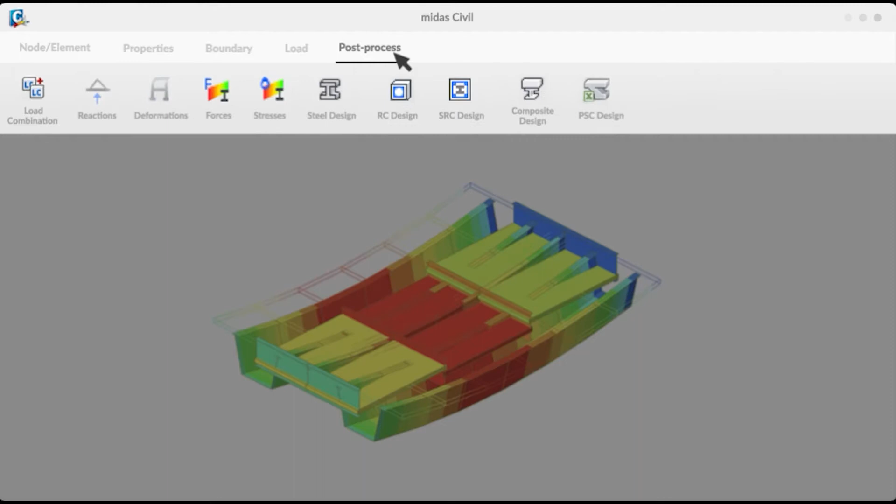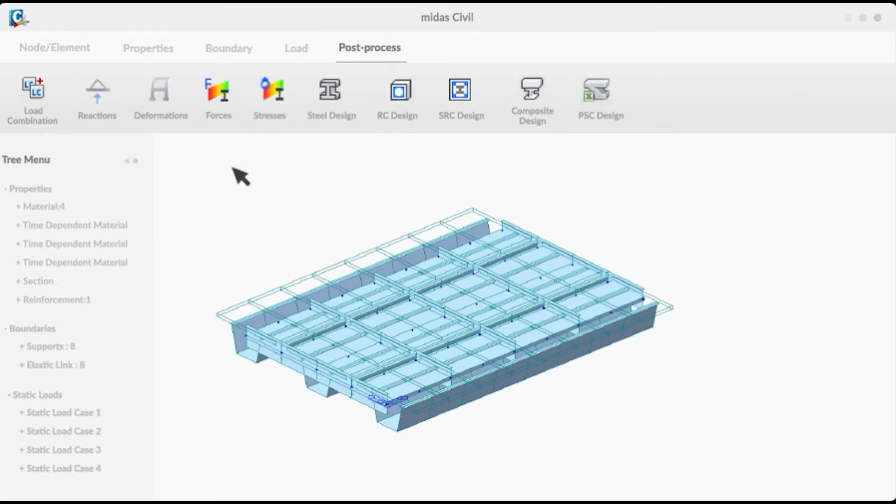First, functional configuration for users' work efficiency. Functions such as modeling, boundary condition inputs, load inputs, and etc. are grouped in the upper menu bar so that users can find them easily. We can create a model and finish structural analysis by simply using the functions in menu bar order or by the working order. One can quickly finish the work since all the data can be extracted or edited in text format.

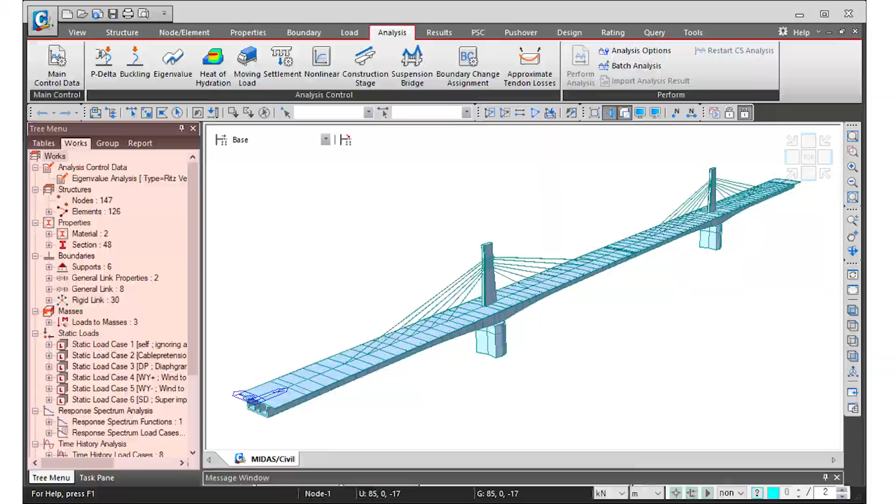Second, it provides various analysis modes. You can experience everything from general static analysis to moving load analysis, dynamic analysis, construction stage analysis, and nonlinear analysis for bridges, in just one program by using the minimum model file.

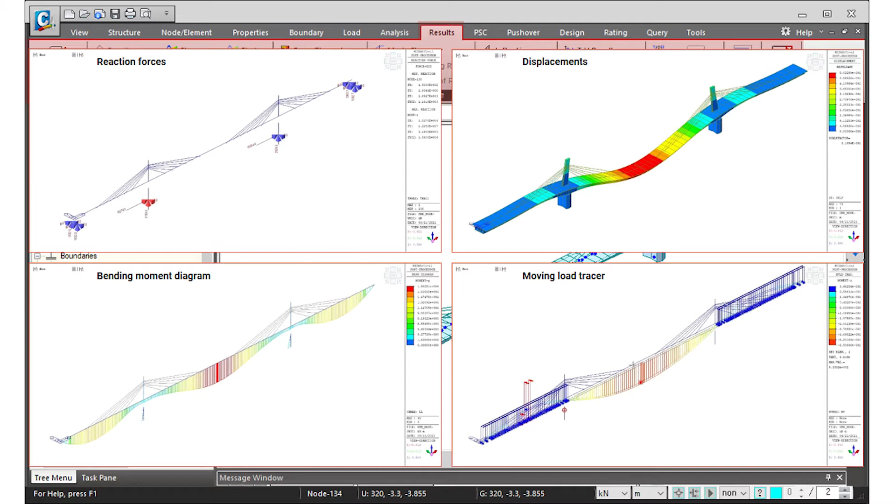Last but not least, one can simply obtain every analysis result that is required for design. Analysis data is provided graphically and numerically, so you can intuitively grasp the analysis results and accurately predict the behavior of structures. Not only that, section design reports provide detailed results according to national design standards.

So starting this week, our weekly webinars will be on air as well as training sessions. The schedule will be posted later on in this video. Teo, could you please go ahead and share the related key features for this week first? Alright, I'd like to introduce key features regarding generating a model, moving load analysis, and the incrementally launching method wizard for this week.

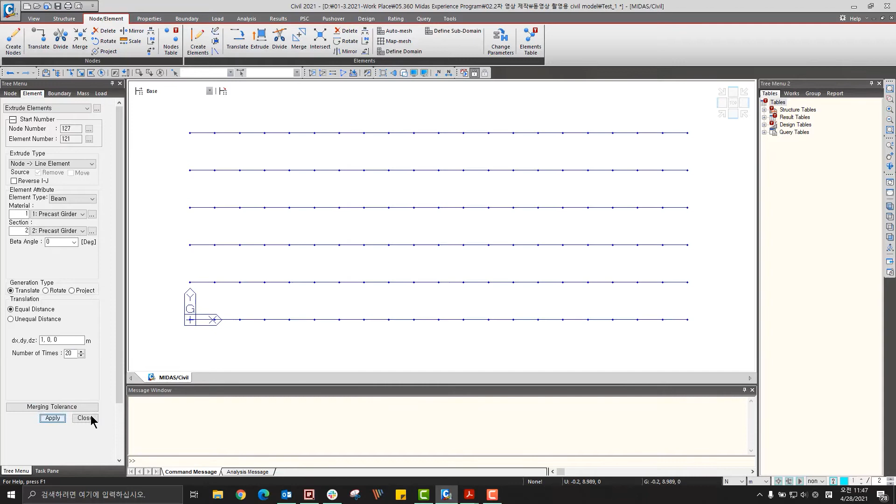About generating a model, one can create a Midas Civil model by various methods: by creating nodes and elements manually, loading geometry from a drawing, creating in text format, or by simply using a wizard.

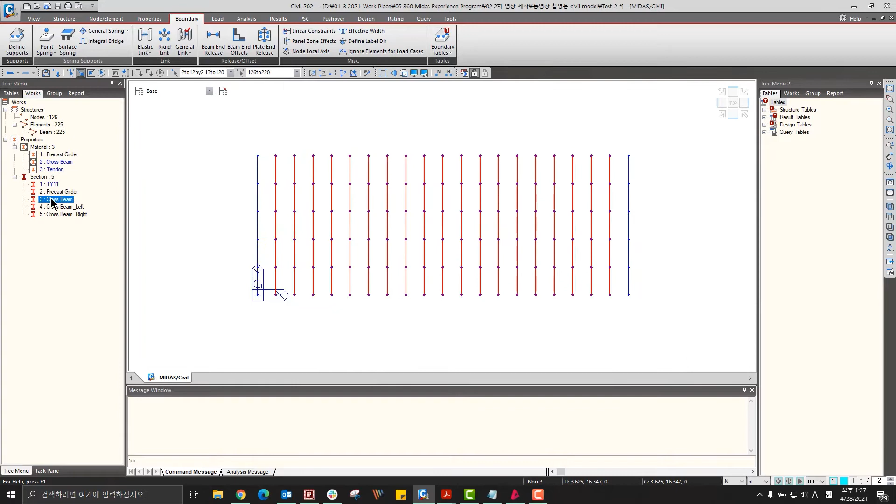I would suggest our geometry modeling techniques session this week for those who seek to try Midas Civil's unique modeling method. I would also suggest this webinar for those who are only used to the simple modeling features.

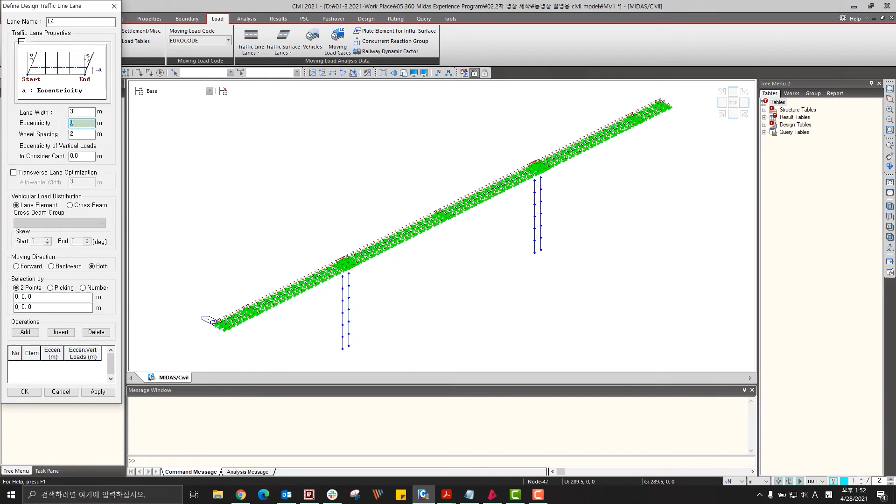Our next topic is moving load analysis. In Midas Civil, moving load analysis is done by the influence line method. We locate the specified vehicle loads on the influence line to obtain critical results. This week, we'll introduce the features and details of moving load analysis in the moving load for road and railway bridge session. It's an essential part of bridge design, so we encourage your attendance.

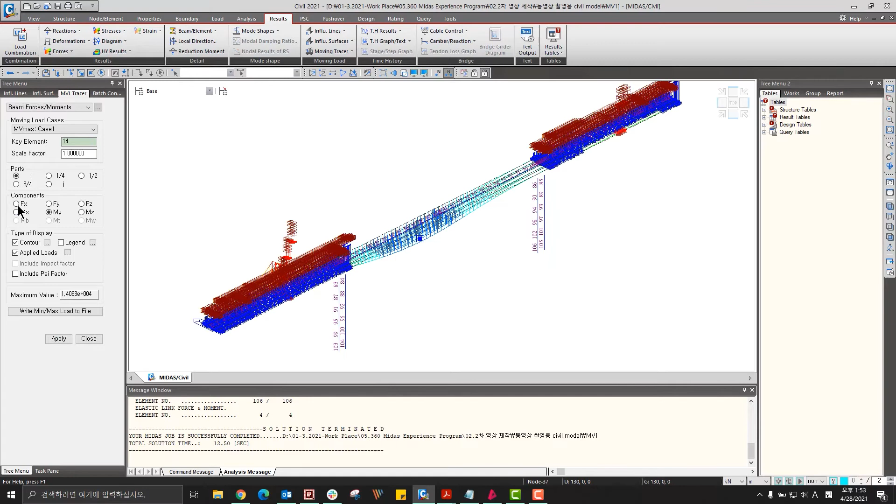Taeyong, please go ahead and introduce the last feature. The last feature I want to highlight is the ILM wizard. ILM is short for incrementally launching method. The principle of this method is to push girders forward and attach a new girder segment at the end of the existing girders, so the boundary condition has to change during construction.

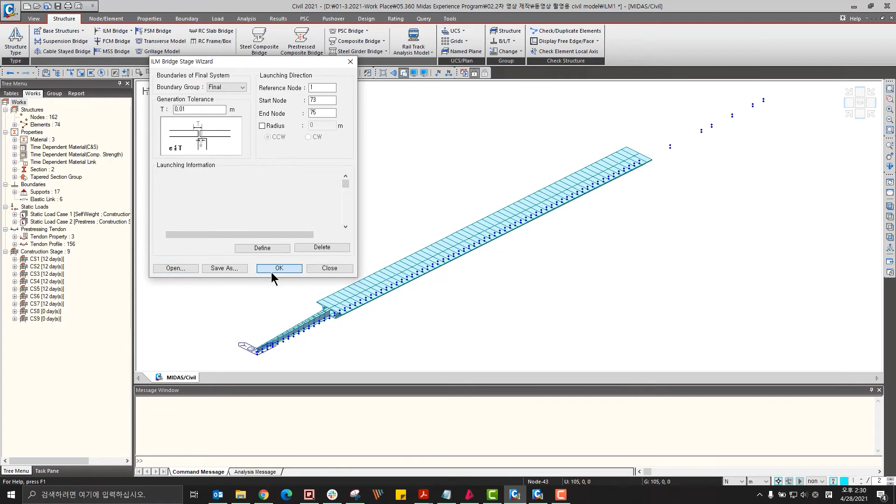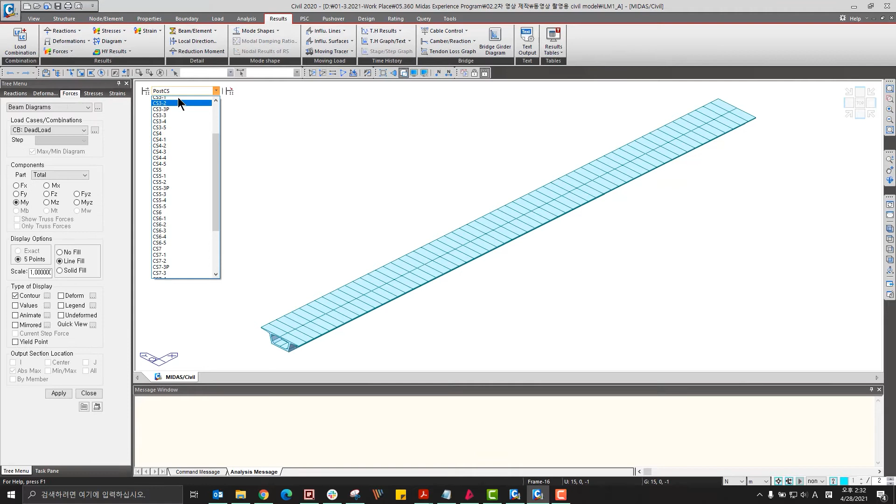In order to consider bridge analysis with ILM, we should make huge amounts of models. Making such models will consume much time, even if the software has a feature for construction stage analysis. Midas Civil has an ILM wizard to reduce modeling time and help define construction stages.

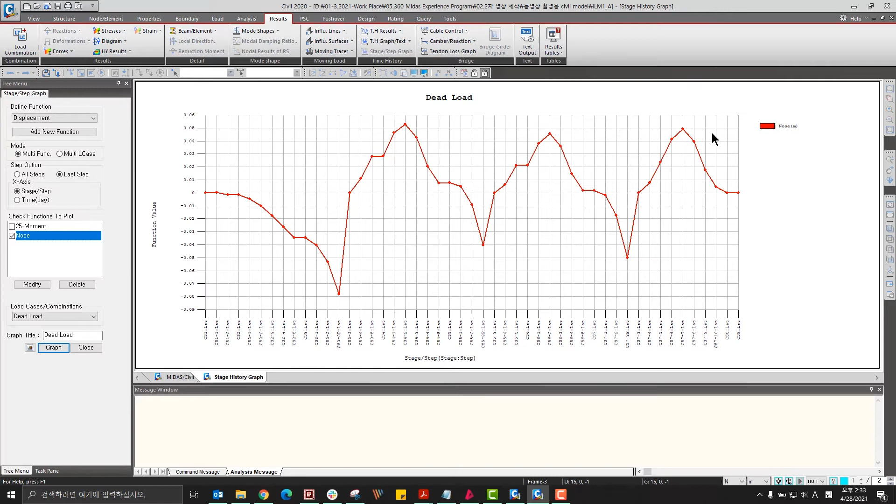This week, a training session will deal with PSC box girder bridge modeling part 2, incrementally launching method. So don't miss out on this training if you wish to learn the usage of the ILM wizard.

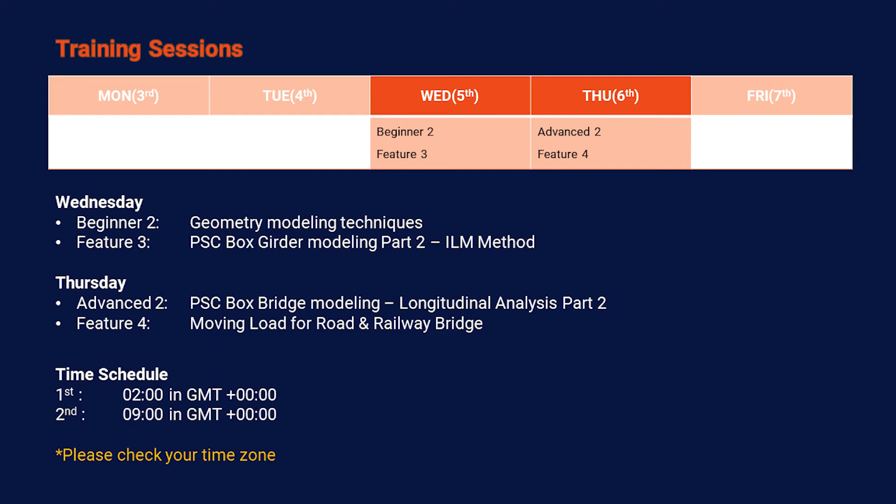Now take a good look at our time schedule. All of the sessions will be presented twice a day. So for example, there will be beginner and feature sessions both at 2 a.m. and 9 a.m. GMT, so please be sure to check your time zone with GMT.